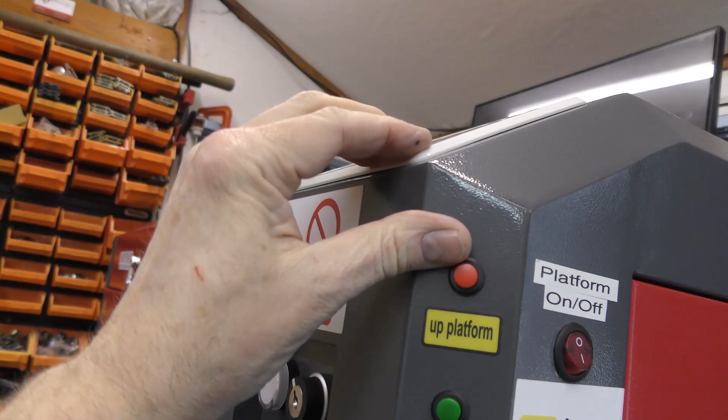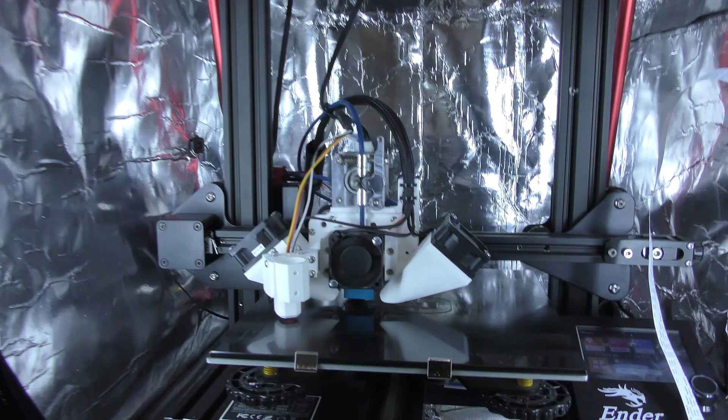So we've bought one of the Lightburn cameras, the 8 megapixel camera. It's going to be going inside the lid up the top there, just in here. That arrived from a UK company called Smoke and Mirrors. I'll add their website link to this description.

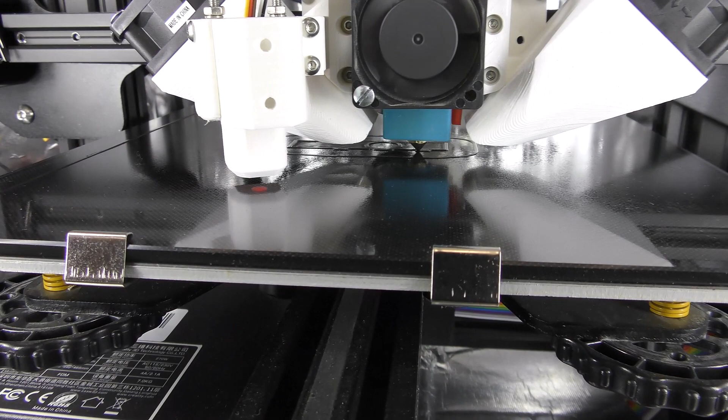So we are currently just printing the faceplate for the camera. I've already printed two other things, and all we've got left now, after this, will be the two knobs that tighten it up. So yeah, that is printing away.

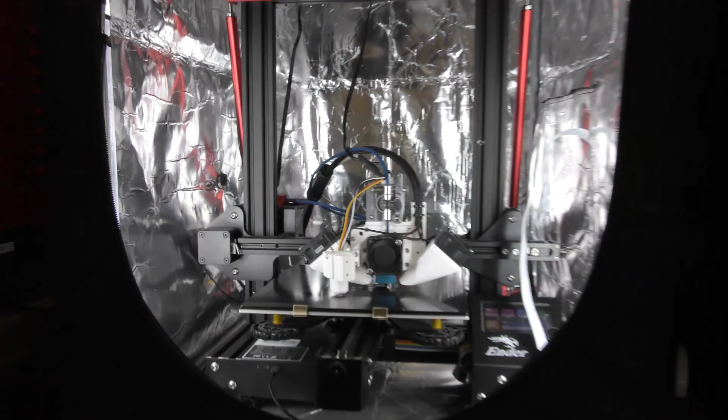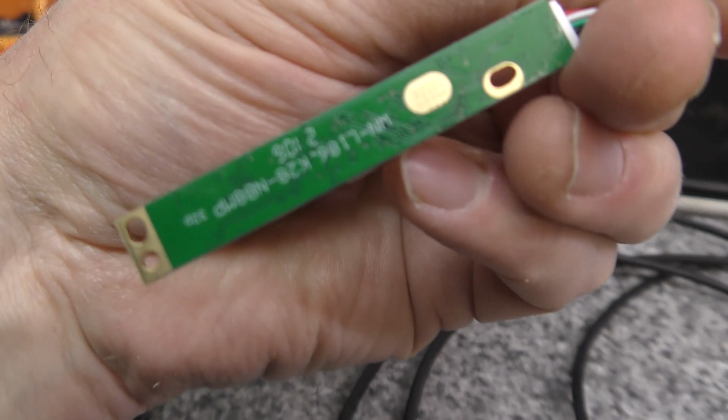So if we just spin over here, this is the camera. Supplied with this USB cable, it's about 9-10 foot long, and it just plugs in there.

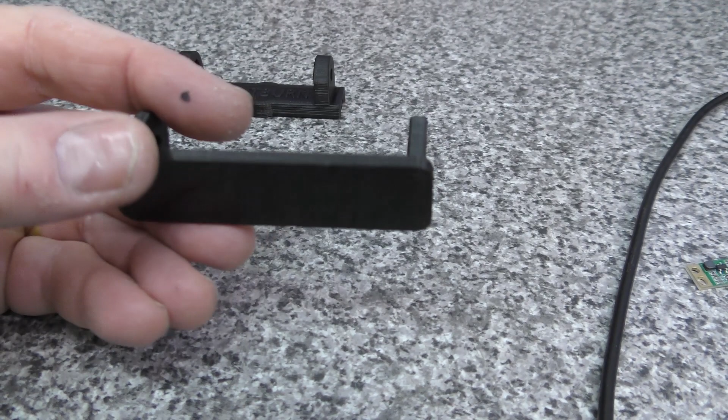So we've printed off the Lightburn base. Now this does need support. Look at this finish - the glass hot plate really just brings that out. I don't know whether I can get it in focus or not, but it really does produce a very nice finish - probably not focused on it, but you get the idea. So you print with supports, you just punch the supports out of the holes either end when it's finished printing. Very happy with that.

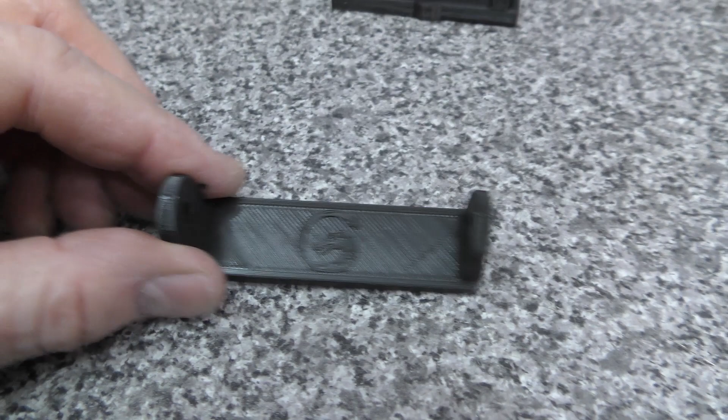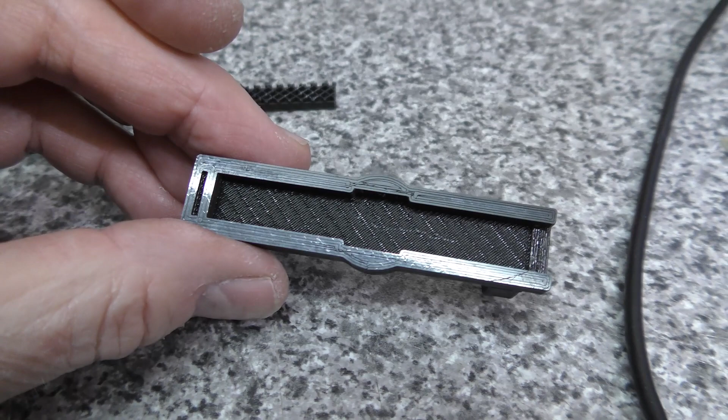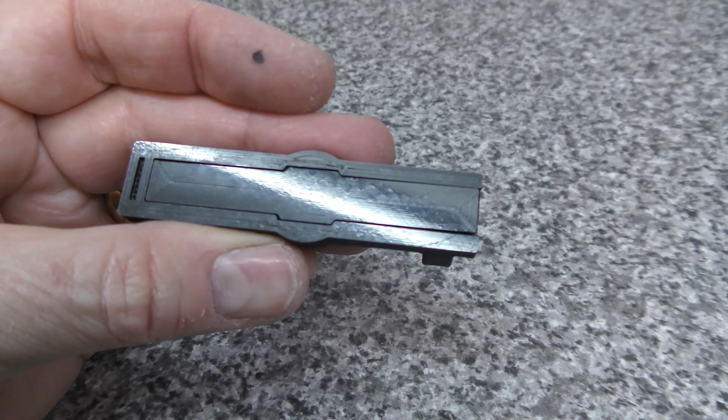Next bit was the bit here with the captive nuts that goes like that, and the camera PCB just sits in there. Again, this needs supports, so when it's printed it comes out like that, and you just go in at the side there, and that whole bit pops out.

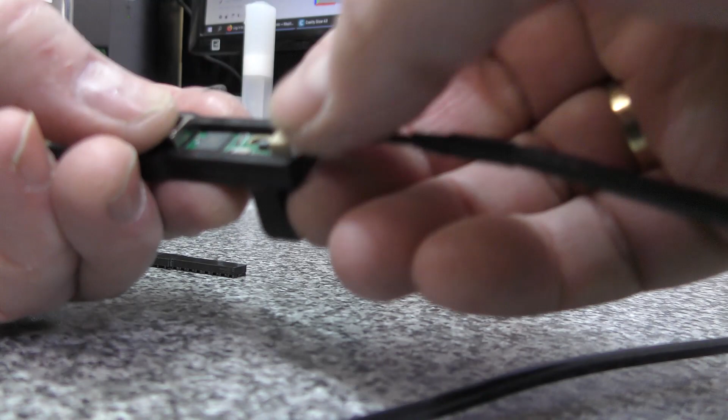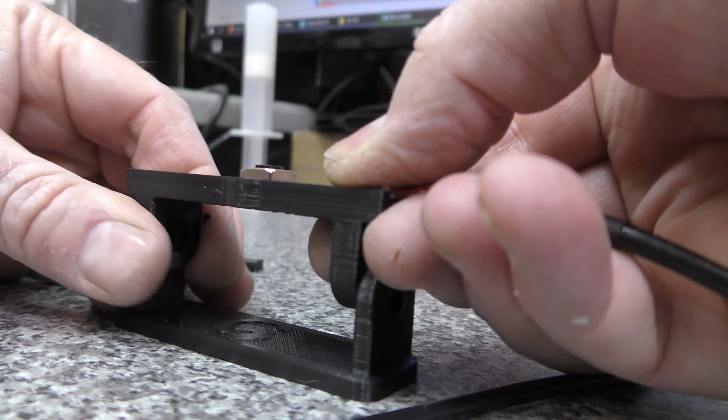So I put the camera here on the bench, the camera will just slide in like so. The bit I'm printing is the cap that goes over here, and we've got two knobs that will go through that, captive nuts in here, and then we can adjust it backwards and forwards.

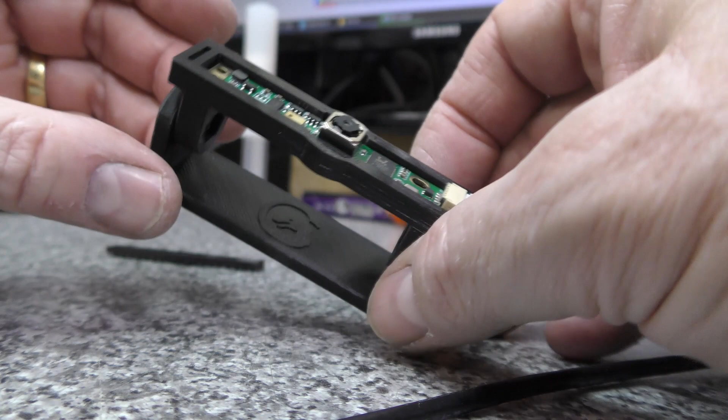And I've already printed out the calibration sheet. It's just an A4 piece of dots, great big dots for calibration and everything, and I think this should help quite a bit. So whilst that other bit is printing, we'll find some captive nuts and bolts of the right size, and yeah, we'll be good to go.

I did consider some of the other designs where this actually screws to the lid, but I think with some double-sided tape it will be good enough. It's such a perfect finish - I can barely believe that's a 3D print. That glass bed really does leave the nicest of finishes, as you can see, hopefully.

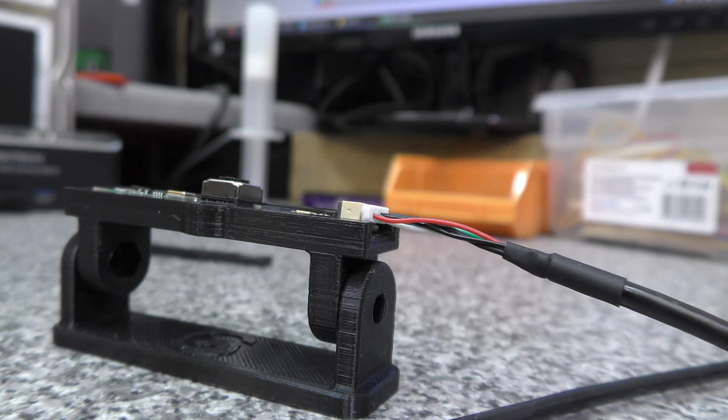So yeah, we'll do the other bits, get this assembled, and show you the results.

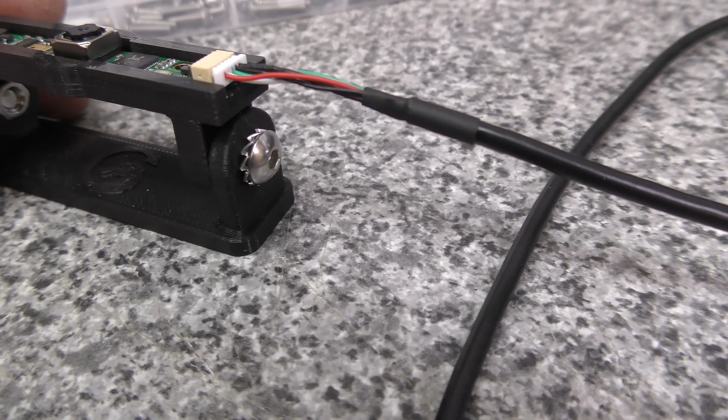Right, so I've got some M5 by 12 Allen bolts, captive nuts to suit. Now I talked about star washers on those earth points on the laser last week. I've popped them on there at the moment just loose, because once this is absolutely bang on, we'll probably just nip these up with those star washers on there, and that should stop that from ever moving again, hopefully. The star washers come in a nice little kit from Amazon, same with the Allen key nuts and bolts.

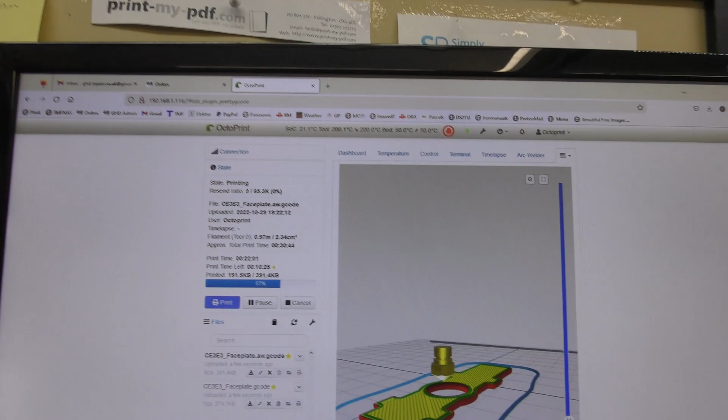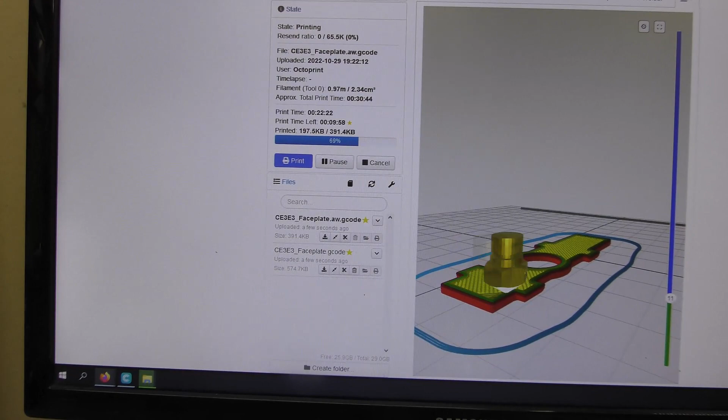So for this we're using a Creality slicer, 4.8 at the moment - I don't know whether that's been updated. And then I just chuck it over to Octoprint, which I think is really good. I use this arc welder plug-in as well, and in this case it's changed it from 574K down to 391, so not much in this particular case, but in other instances you can save quite a bit of time by using it. So that's where we are.

Quite a way to go yet. Well, it's 70%. It's got to bring up the four tabs to clip it together. No supports on this one, I don't think.

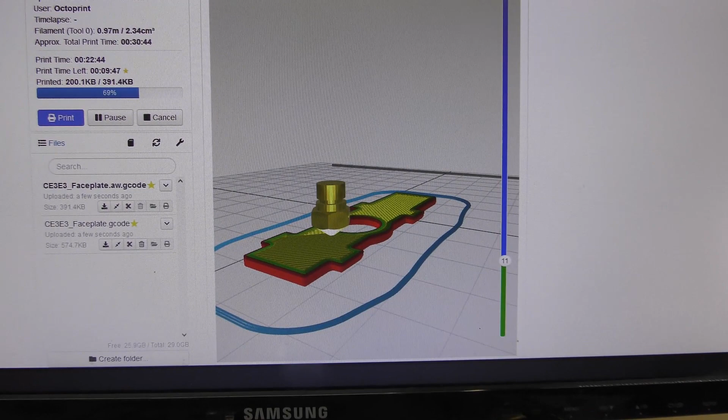But yeah, so this is looking quite good, and when that's finished - oh, actually it's got nuts being printed, isn't it? I've forgotten about that. We've got knurled knobs, so actually we could not bother printing those if I'm happy with this. Yeah, of course, I'm jumping the gun a bit here.

Those knurled knobs that we were going to be printing go on the end with a longer bolt and through into the captive nut. So actually this might be a nicer solution, just to nip these bolts up as I've done here. I'm not expecting to have to adjust this very often once it's calibrated. So yeah, interesting, we'll see. I'd completely forgotten about those. So yeah, we'll be back in a while and see whether we leave it like this or not.

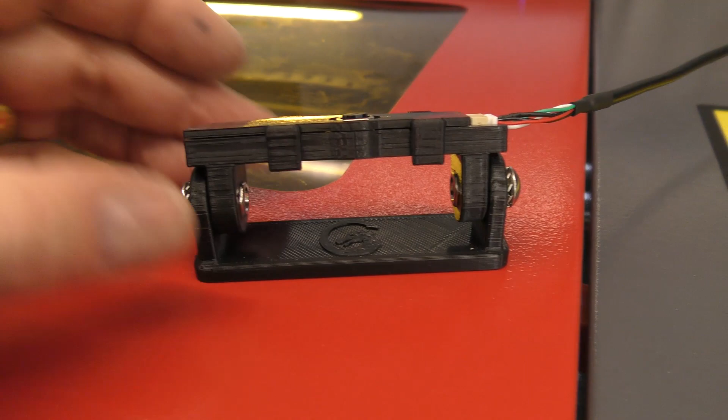Okay, so that is sorted. I definitely don't want the two knurled knobs for the end. I'm quite happy locking it in place with those Allen screws.

You can see on the Lightburn that it is working. It's obviously going to go in the lid, but you get the idea, hopefully, of the quality of this - 8 megapixel, I think it said it was. So yeah, shouldn't have any issues with that, hopefully. It really is high quality.

Anyway, so that is the housing done. If it'll focus, just a little clip over the top, and we'll get some 3M double-sided tape, stick that into the lid. I've got some stick-on cable clips that will run around the lid, hopefully. So it will stick on up here by the handle, and then we'll just run the USB cable with the clips down there.